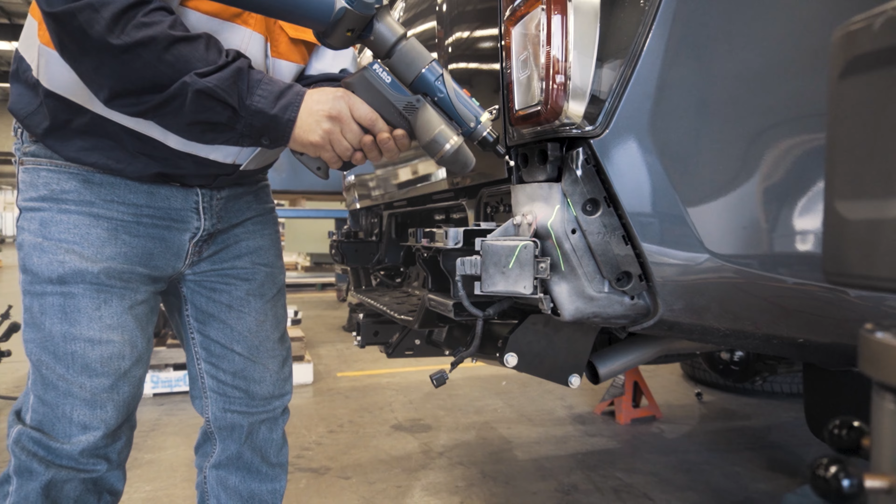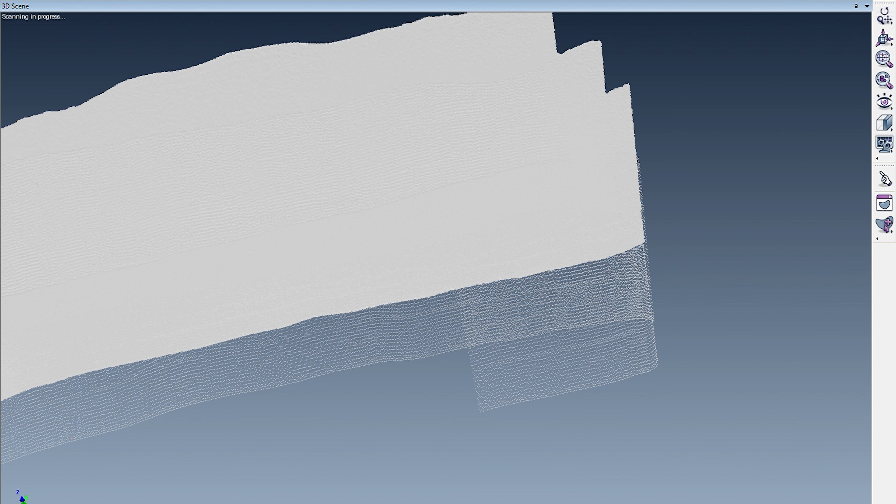Alright, so we've got Stefan here from Target 3D. He's the guy we get in to 3D scan all our vehicles. We have done a full video of the 3D scan when we did an F250 and a Chevy 1500. Basically to run through quickly what we're doing here, this is a Faro arm, it's a 3D laser scanner. So what we do, we physically scan the car. As you see the green laser going over the car, it bounces straight into the computer and we build up an image of this vehicle so we can get it into the computer and design the best possible tray and canopy for it.

So it means there's no need to prototype, we know it's gonna fit first go. There aren't any, oh bugger, we didn't see that mount there, because we know it's there, we have a 100% accurate image. The laser is about 0.1 of a millimeter accurate, and we can also go down to 0.05 depending if we do a probing technique, which is a bit different to a laser scan.

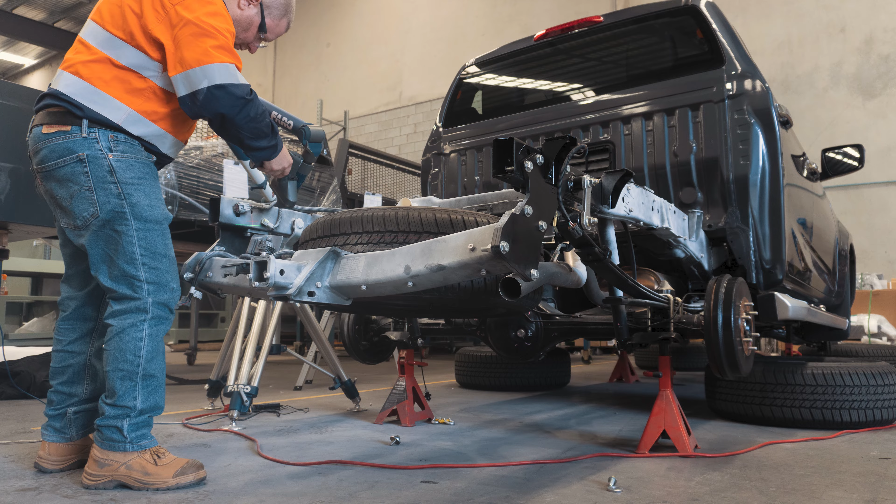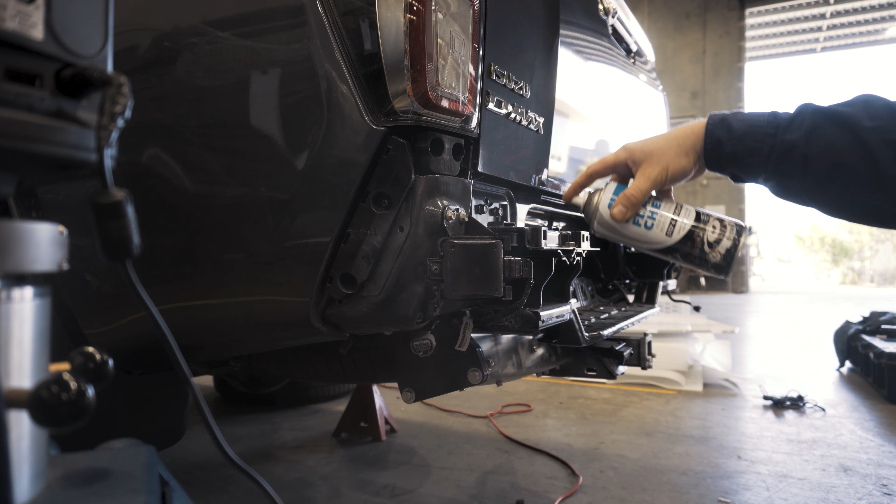Alright, so what you can see here, we have removed the rear bumper of this Dmax, and this here is the actual rear sonar of this car. So this is the thing that's been stopping GCI Traytec completing tray and canopy packages for the Dmax up until now. It's super critical that we get these sensors exactly where they are as factory to make sure we don't throw any error codes and that there's no issues whatsoever.

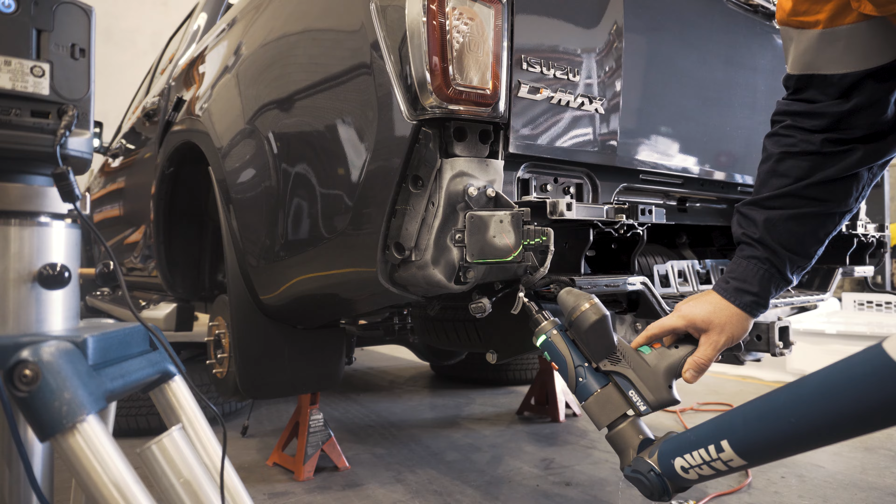So the best way to do it is to 3D scan it. We can't get data direct from Isuzu, so we 3D scan. What this white stuff here is, that's a chalk spray to dull down the shininess of the plastic on the sensor. It just makes it easier for the laser to pick it up. When it's really shiny, the laser doesn't work very well, so I put a chalk spray on it. It's actually a chalk spray out of a crack detection kit. That way we can pick it up within about 0.1 millimeter accuracy, which is really cool.

Alright, so from this point forward, what's gonna happen is I'm gonna take off this sensor, then 3D model it, and then I can put my physical sensor overlaid on the scan. So it means my sensor's bang on where it is as per factory. This tub goes back on and then we drive it around until we finish the design.

For Stefan at Target 3D, rule of thumb, every hour he spends laser scanning, he has another hour post-processing. So then he's gonna knit all the scans together, tidy it all up, and put it on a Dropbox, send it to me, then I'll get it Monday morning. So we've got the scan data. Stefan has worked through the weekend to get everything to me by Monday morning.

So what we're going to do now, we're going to have a look at the scan, see what sort of features we need, what needs to happen with the tray to make sure all the functionality of the sensors works, and then also we'll build up the tray. We'll set the tray height and tray positioning, tray length. We'll just run through briefly how we set everything here at GCI Traytec.

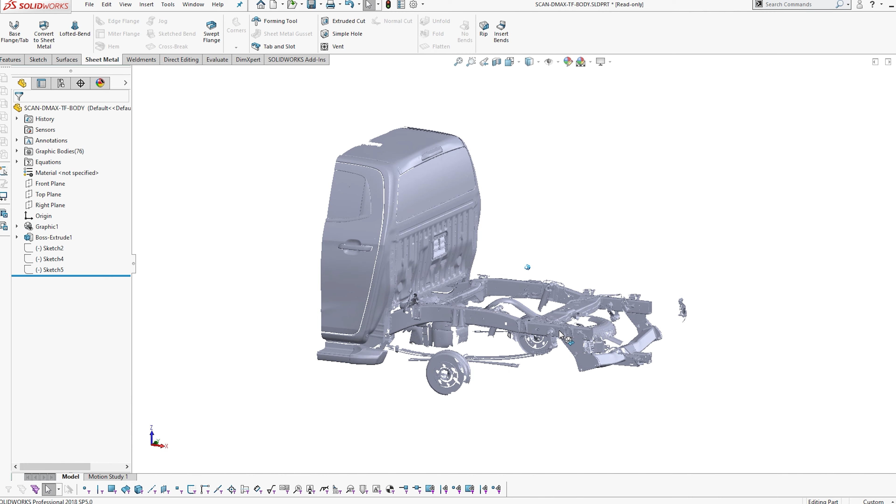So in front of me here, this is the scan data. It is a 0.1 millimeter accurate model of the exact car we scanned. So we can literally zoom in, let's go to the fuel filler, so we can see exactly there what's happening with the fuel. The resolution is wound all the way down so the computers can run it.

Basically it's 1 in 100 scan points. Stefan actually uploads it to me, otherwise my computer would have no chance of running it. Yes, it's a water-cooled computer, but we still can't process all the data that he can give us.

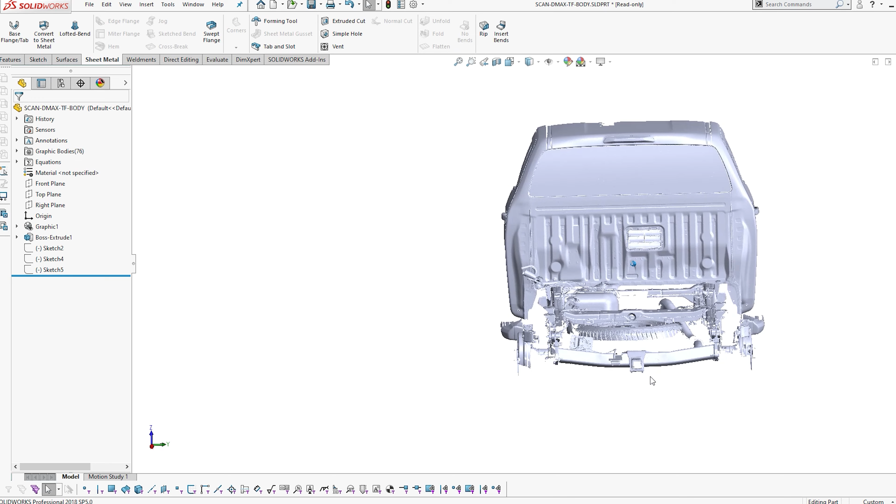So these are the sensors here, these things hanging out the back, that's what we need to replicate. We need to make sure they are mounted exactly where they are as per factory, so they work once the tray goes on.

Fast forward a few days because it takes me a while to do the design. Should I move slightly so it looks different? Should I move the chair a little bit? No, it should be right. Should I put a high vis in the background at all? No, just leave it.

So fast forwarding a few days, I've designed the tray. What we've done, we'll run through it shortly, but we've mounted everything up. We've made new housings for those sensors, and everything is going to work as per factory, hopefully. We're going to be putting it on in a few weeks from now.

So obviously we still need to manufacture everything here. Manufacturing does take time, things don't happen overnight. So we need to run through the whole manufacturing process in the factory. Once all the parts come through, we'll assemble it, and that will be the next episode.

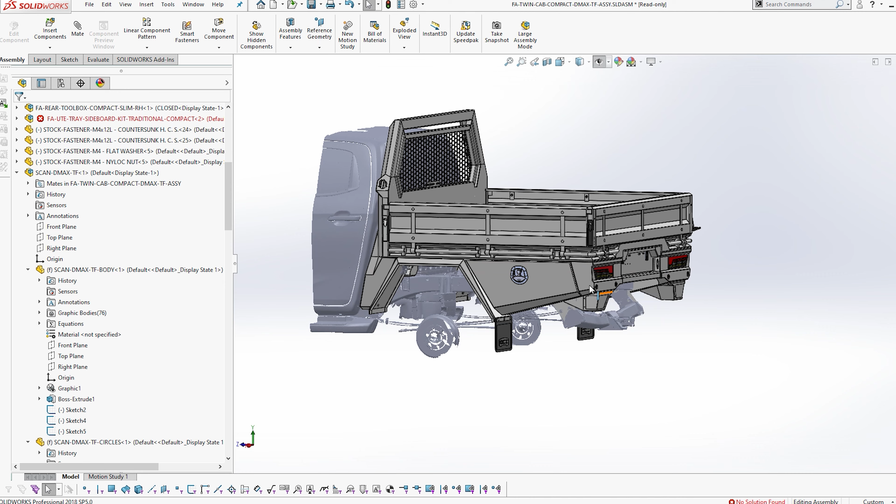But for now, let's have a look at this. So this is my scan data that we just saw before with a tray on the back of it. First thing you'll notice are these guys down here, these are the sensor housings.

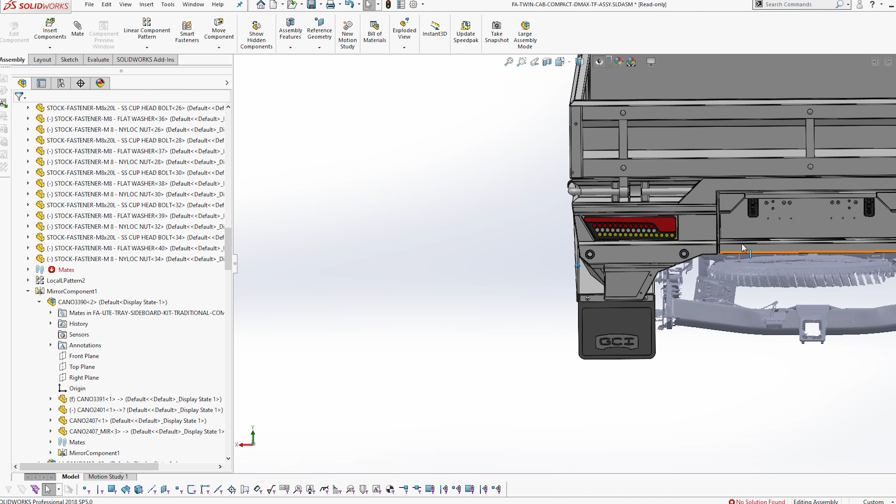There's many reasons why we've mounted them exactly where they have. I won't run through them all, but there is, in theory, going to be a perfect match for the factory sensor and the GCI Traytec tray. We've integrated them as best as possible, picked up on all the lines so they flow really nicely with the back of the tray, and it's going to be full field of vision on this side as well with that sensor.

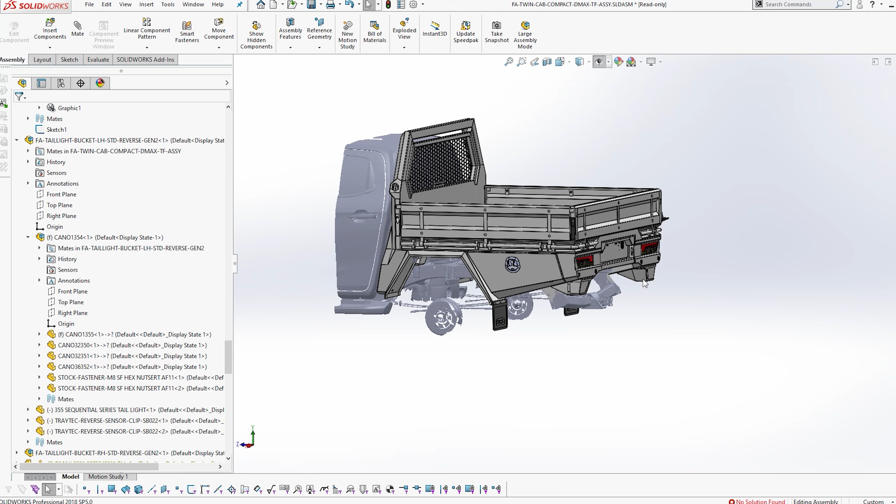So front infills, toolboxes, tail light buckets, the sensors, rear tunnel drawer, everything you can imagine, or everything you could want in the tray, is mounted on this one, and will be going onto that Dmax.

So tray height, what we've done, it is slightly higher than some of the other cars out there. The cab sits quite low on the Dmax, so we've had to make the tray sit slightly higher, but it will make the roof rack on the cab, and then also the roof rack on the canopy, quite level.

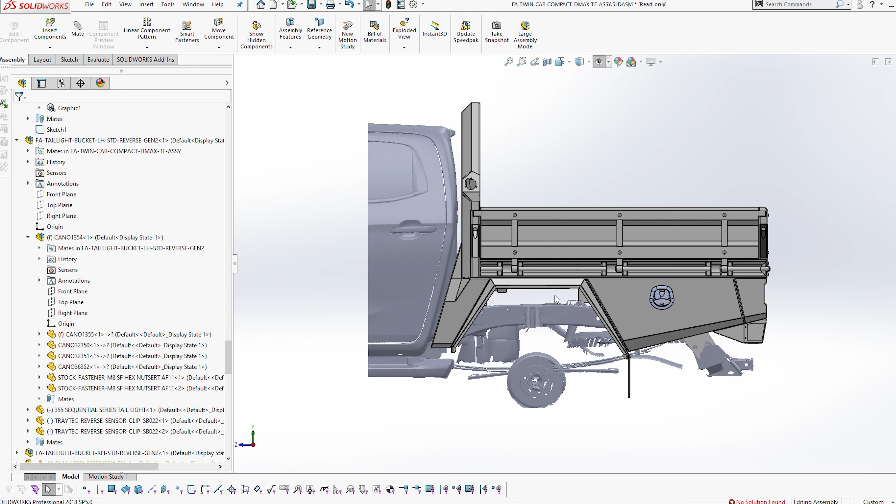So the line we've done here has to match the factory wheel arch of the tub, otherwise there's not going to be enough wheel clearance as you go into full bump, you're going to be scrubbing on everything. So we have to make sure that height's the same, and then we also take into consideration what's underneath.

So with the tunnel drawers and water tanks, we know where they sit. I'm just going to cut the tray in half so we can see exactly what it is. With the tray sitting where it is, that is the deepest tunnel drawer we do, the same one we use on all the 79s and on the American builds. That also fits into this Dmax because there's quite a lot of clearance there.

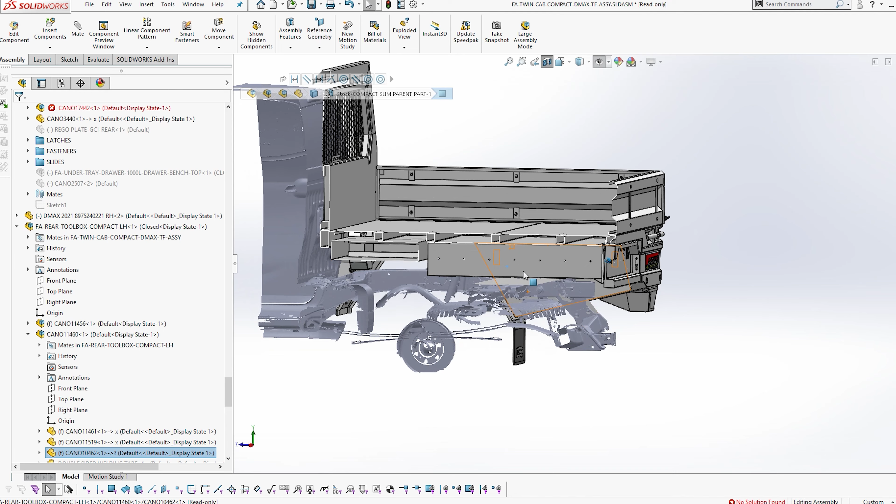Water tank, we are still limited to our 36 because the next size up, which is a 75, hits on one of the cross members. So we can maximize that space down there as far as the tunnel drawer. And then also if we look head on, we make sure the rear window is in full visibility of that window protector.

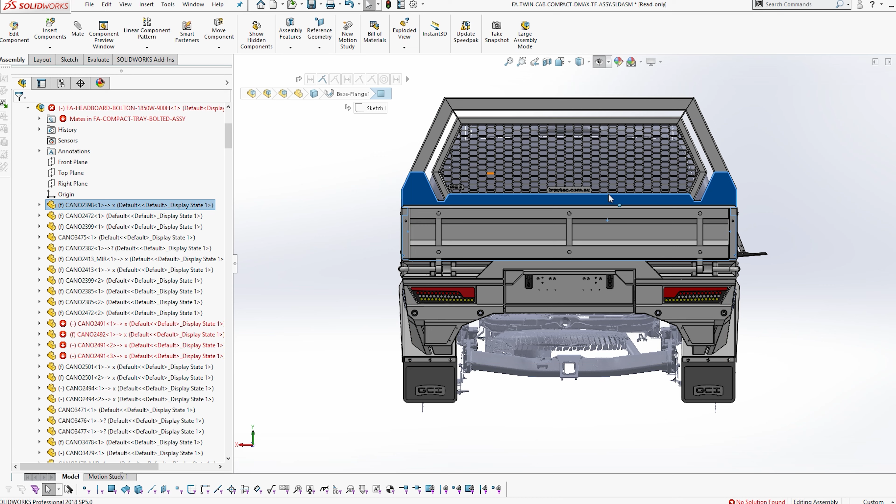So one last look at this tray, we'll spin it around. This is sort of the last take we'll have up here, and then we'll get into the manufacturing. We'll run through the workshop as this tray is manufactured here at GCI Group.

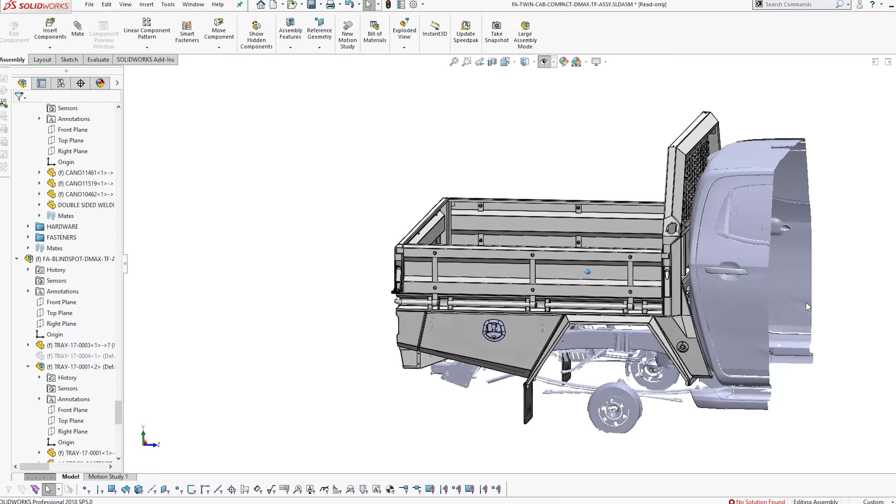Let's spin this around one last time. Have a look at it here - it will look very much the same as this on the car. I think we're gonna go for a nicer black powder coat, but we'll touch on that later. So yeah, that is the design for the brand new 2020 or 2021 Dmax.

So from here, the tray's obviously gonna get manufactured. We're gonna take this opportunity to go see what modifications we can do to the current model Dmax. I know a lot of you guys have been hanging in to see exactly what mods we're gonna do. Before we say what we're gonna do, start thinking yourself and post below in the comments what you would do if this was your Dmax.

We're not gonna go absolutely ridiculous - this car is being used every single day, so it still needs to be practical. Keep that in mind as we decide what we're gonna be doing to this car. But for now, let's go to EC Offroad. These guys modify vehicles day in, day out. We're going to chat to the guys there, Dean and Kyle, to see what's possible. We're going to get a complete list, and then from there we'll pick out what we want to do and how we're going to modify this Dmax whilst the tray's in manufacture.

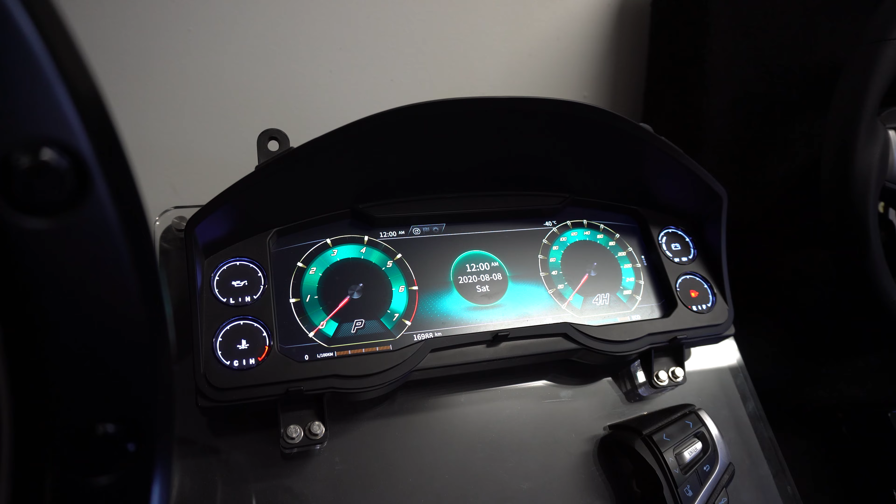All right, so we're here at EC Offroad with Kale, the owner. Good to see you. So basically, EC Offroad is the specialist when it comes to everything from a weekender build to the ultimate tourer. So us at GCI Traytec, we team up with EC Offroad every time we need to do something that we don't specialize in. We do the trays and canopies, these guys do everything else.

Maybe just run us through - we've done a few builds together now. What sort of stuff have you done on our builds which GCI Traytec hasn't done? We can do everything from suspension, the wheels, tyres, get that thing looking good. All your exterior chrome deletes and your inside trims, and then a lot of GVM upgrades, and then what we specialise in - the electrics, so lithium batteries, inverters, monitoring systems, air tanks, whatever really. Yeah, you name it, you guys do it basically.

So Dmax, we bought a Dmax, brand new. Where do we go? It's stock standard right now, done 3,000 Ks as it sits. We don't want to go crazy with it. It is still going to be a daily drive, so we don't want to go absolutely mental with the mods, but it still needs to be a practical setup - in between the weekender and the full tourer. Yeah, go away for a week or a weekend. Where do you think we should go?

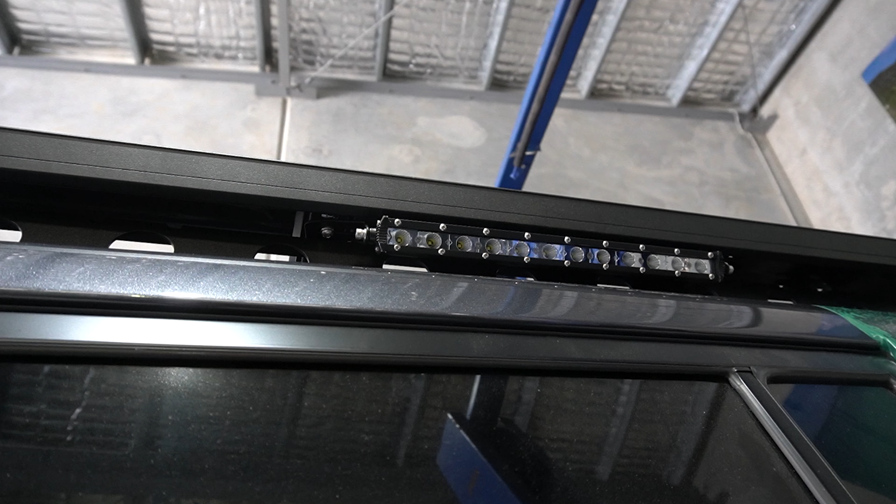So we put together a few options for the Dmax - nothing too crazy, but something you're going to use on the weekend, practical, and keep it affordable. We get a roof platform on top, handy to throw stuff up there, with a big light bar on the front, some work lights on the sides when you're pulling up to camp. On the front, of course, a bull bar with a winch and some lights - it's going to give you that protection, and again, it's going to look cool. We'll color code it all up.

So on the sides, we'll get some rock sliders - remember to slide over those rocks. And then of course, we'll do that chrome delete, get rid of all that ugly chrome on the door handles, the grille, full chrome delete. We're talking about taking off the handles, the badges, everything that's chrome on the car - get rid of it, get it sprayed, paint it probably a satin black or a gloss black. It's going to improve that look and tie in with your canopy on the back. Yeah, definitely.

Moving on to the suspension, we'll do a GVM upgrade to help with the canopy and water tanks when she's loaded up. It's a full suspension, 2-inch lift, with a GVM upgrade. We'll try to get some remote res shocks in there so you can adjust them when your canopy's loaded. If we're putting a fair bit of weight on it, the GVM upgrade is going to be awesome, but what about airbags? What options are there? Yeah, you don't want it sagging.

So local guys, Airbag Man, they do some awesome products. You can get leaf helpers in the rear, and we can put onboard air in. These days there's a range of different controls for airbags, from manual paddles, to manually connecting the hose at the rear, to full wireless remote, to digital buttons up front with a gauge. There's heaps of options, so we'll probably roll with digital buttons up front and little gauges to make it handy to adjust on the fly.

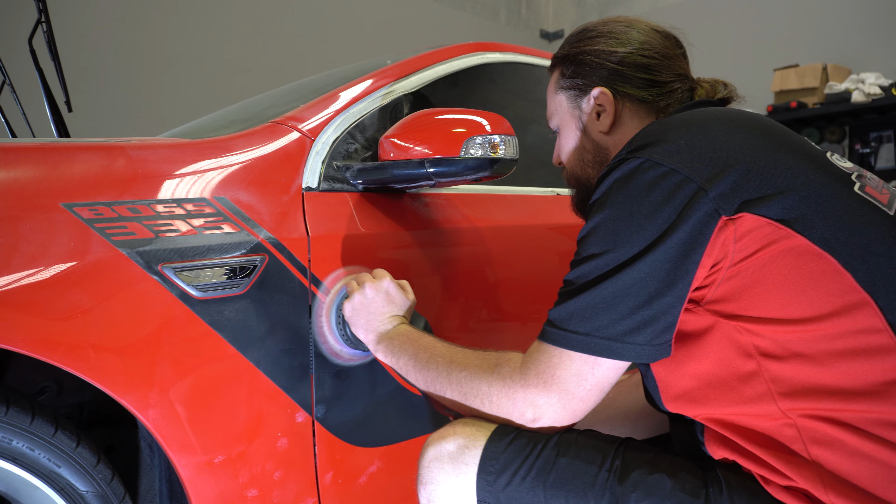After we get the suspension in, we'll look at doing a full remap tune and an exhaust system to get that little bit of note, nothing too crazy. And to protect it all, we do the Pomponazzi coating in-house, and the TU coating underneath is like a rust proof for when you go on the beach. The pomp coating is amazing, it's that ceramic coating - you go out, get your pinstripes, and literally just wipe them off.

It's incredible. So on the inside, the new Dmax these days has got pretty good tech, but we'll look at getting your HEMA mapping and stuff on that head unit, do a few little tweaks there for you, see if we can run some gauges or something. I can't wait. I reckon the only thing we've missed out of all that is maybe some tint.

Do you guys do tint as well? Yeah, we do tint. Put some tint on it. Wheels, tyres, we'll get some mud terrains or something. Yeah, some all terrains and muddies. We'll see how we go.

I guess that's a full list of what you can do to a Dmax. Obviously we probably won't do it all. We'll go through everything we've spoken about today and figure out exactly what we want to do to make it the ideal solution for us at GCI Traytec. This car we're going to take to all the shows - it's going down to the Melbourne 4x4 show. It's going to be a really, really cool setup, and can't wait to get into it with the boys here at EC.

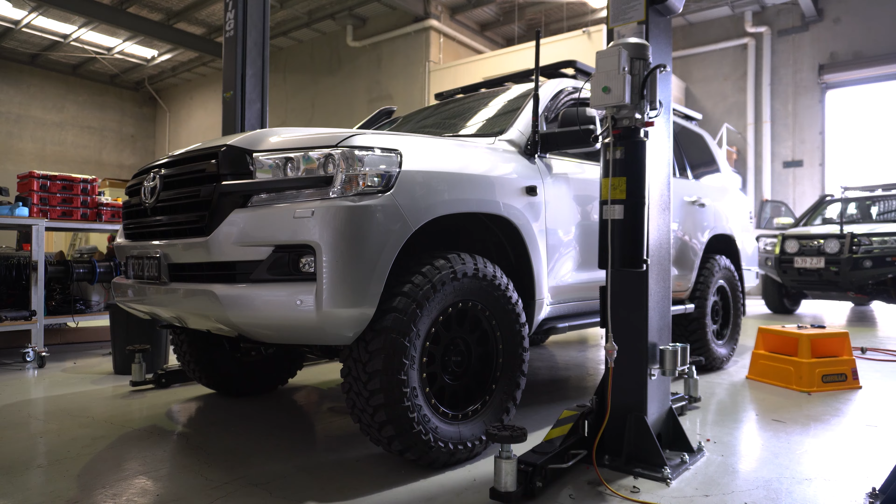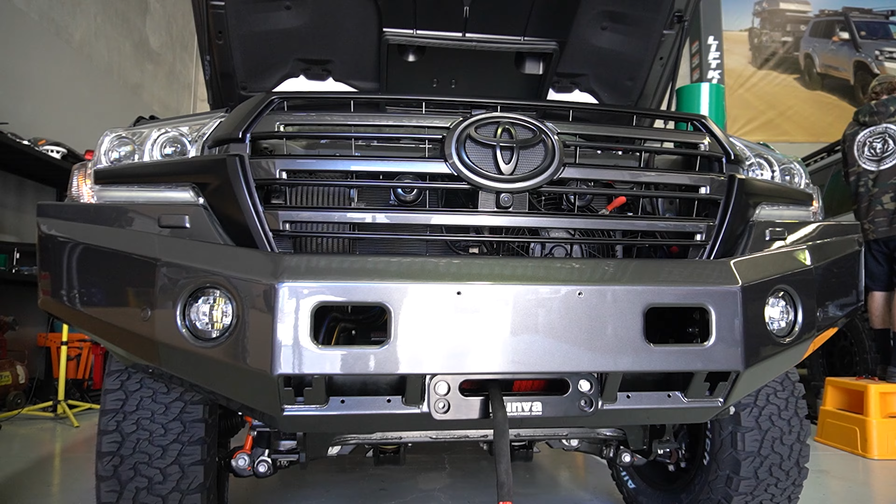G'day, mate. Alistair, how are you? Big hand. Clap, just one clap please. Yep, good.

Come down to, obviously, front bar, winch, lights. Local guys here, Airbag Man, they do some awesome cool stuff. But obviously you mentioned GVM - what's actually involved with doing a GVM upgrade on these cars? Getting it done.